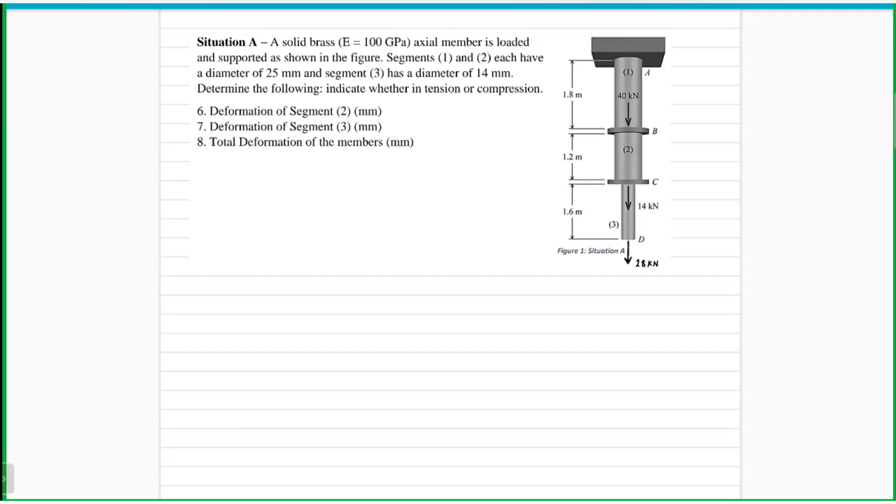As for our first step, we have to set up the axial force diagram. So starting at point A, I'll rotate the figure so it moves to the left side. And then point B, and then point C, and then point D.

So at point D, that's 28 kilonewtons. We have 14 at point C, and then we have 40 at point B.

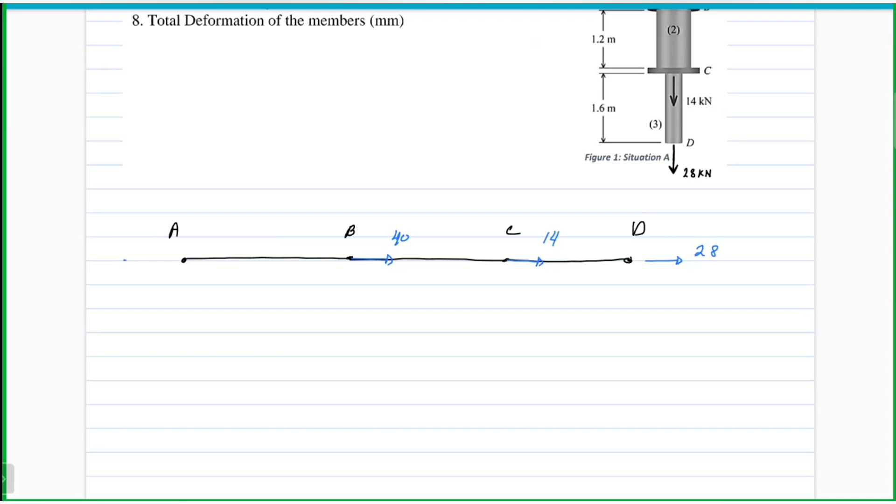Since it's attached at point A, it will have a reaction, and I'll assume that reaction will be to the left, or based on the original figure, upwards. So I'll call this PA.

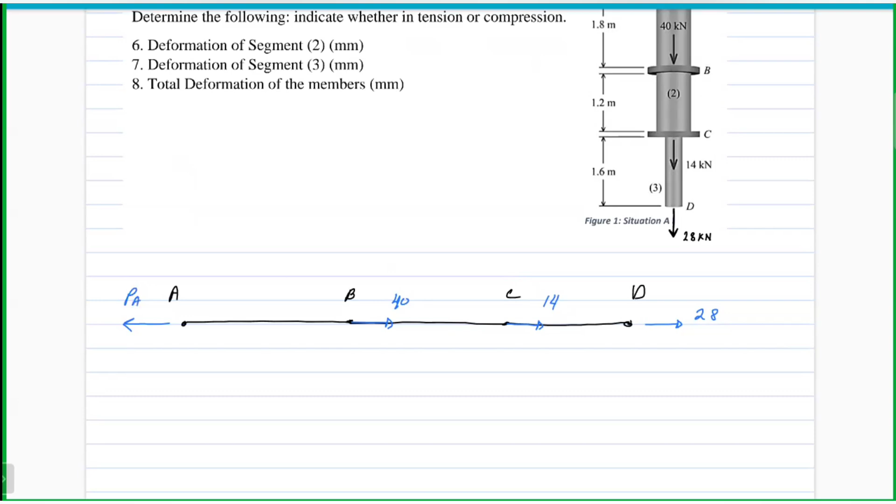Solving for the value of PA, we can use summation of forces along x equal to 0, with to the right as positive. So our reaction at point A: 40 plus 14 plus 28 minus PA equal to 0. So PA is equal to the summation of all the forces applied, which is 82 kilonewtons.

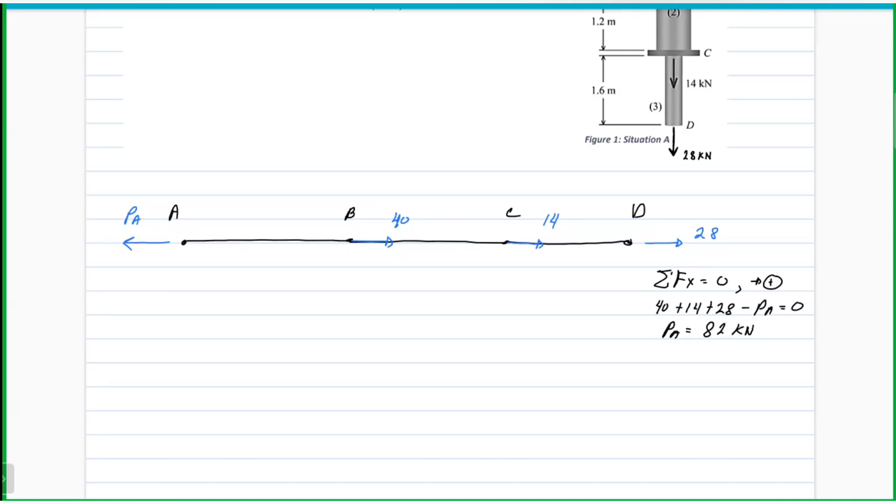And then I'll proceed on establishing the axial force diagram.

So PA is to the left, confirming our assumption. Since this is to the left, when plotted on the axial force diagram, it's negative. But in this figure, force A is acting away from the body, therefore this is in tension, and all positive values will be in compression.

So from point A to point B it goes, and then will be counteracted by the 40 kilonewtons, resulting in negative 42, somewhere here.

And then from point B, that negative 42 will still go on to point C, and then will be counteracted by the 14 kilonewtons, resulting in negative 28. And then finally will be closed at point D.

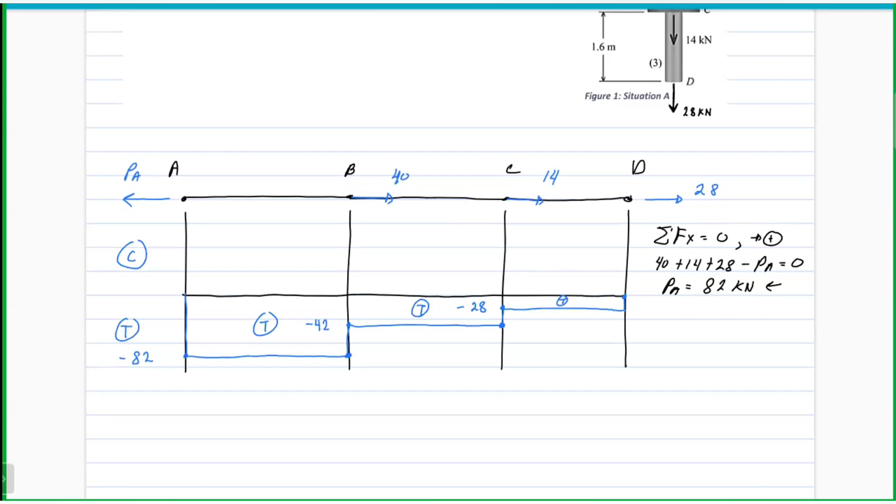So to determine the deformation, since deformation for member AB will be included later in the analysis for total deformation, let's get it too. You just have to be consistent. So deformation at member AB or bar 1, that's PL over AE.

We have an internal force of 82 kilonewtons, which is positive since this is tension, to be converted to newtons to be consistent. The length of member AB is 1.8 meters, times 1,000, over the area. Since only the diameter is given, we have to determine its area.

That's pi over 4 for a circular area times the diameter for bar 1, which is 25 millimeters. The modulus of elasticity is a constant of 100, multiplied by 1,000 to make it megapascal. From this we can cancel out the 1,000, and the 1,000 from the force remains.

So to solve for the value of the deformation, all you have to do is input this in your calculators. And then we'll have the value of 3.0069 millimeters.

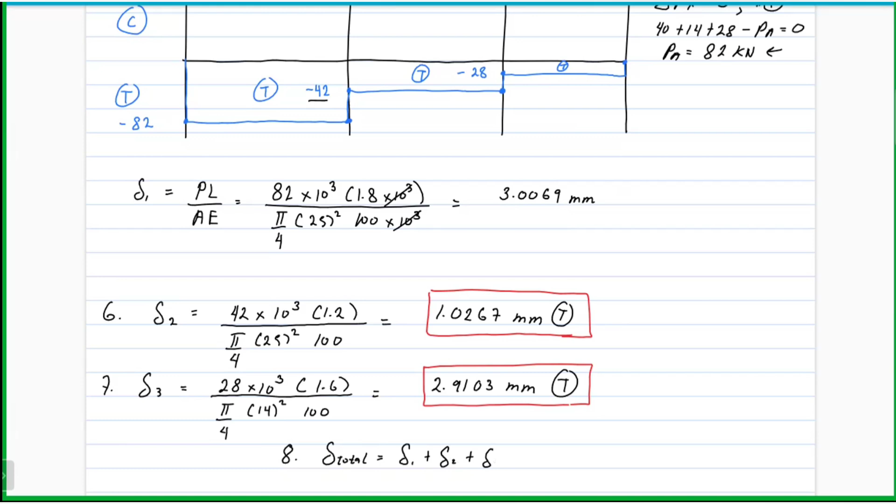So that is equal to deformation 1 plus deformation 2 plus deformation 3. Since all deformations are in tension, we just have to add up all the values for the deformation, and it will result to 6.9439 millimeters.

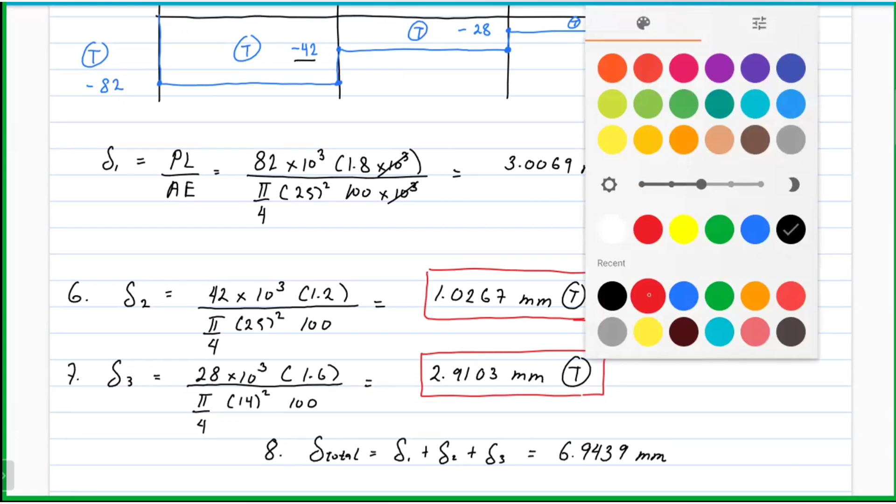So the answer for the number is this.

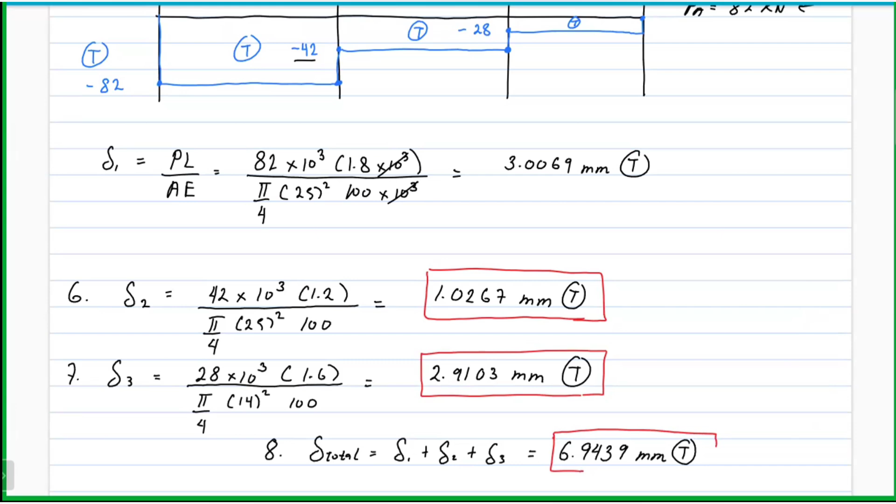Okay, so for situation B, this is another loaded bar problem, but this time it is statically indeterminate. Our strategy here is we must establish the equation, or another set of equations, using the principle of superposition.

The question states that the gap between C and the rigid wall at D is initially 0.15 millimeters, meaning there is an initial gap between point C and point D. A force P equal to 200 kilonewton is applied to the assembly, and we're given the modulus of elasticity and diameters for the members. We have to determine the following support reactions at point A and at point D.

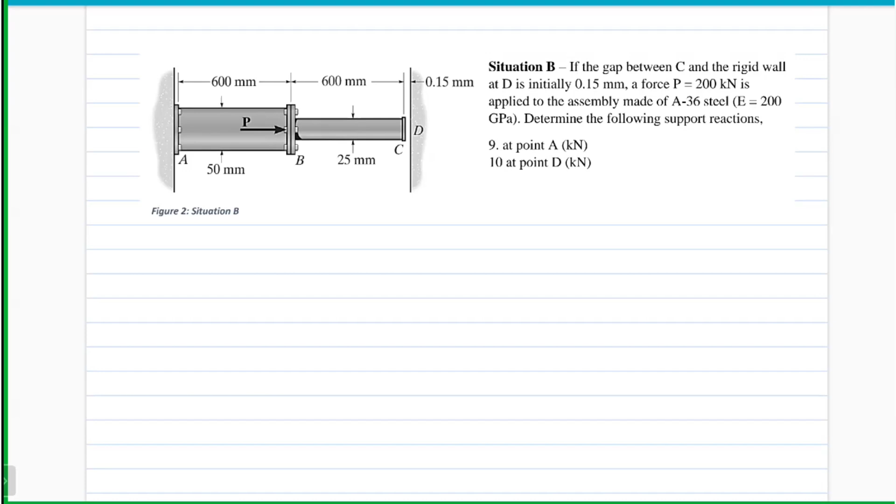So fortunately, we only have to determine the reactions. Setting up the free body diagram, we will know that this force of 200 kilonewton will push member AB up to point D, which will result in a reaction at point D.

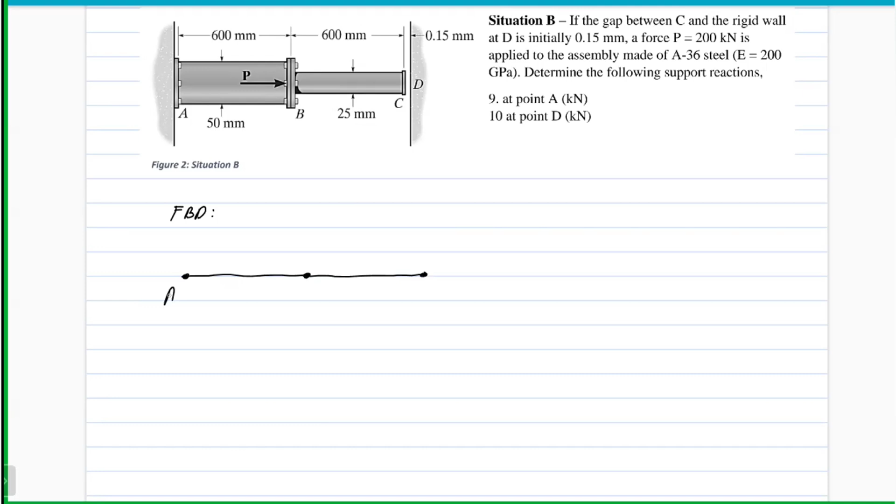So in this free body diagram, I will include the reaction at point D that resulted when it was pushed by the force. So this is point A, point B, and point D.

There is an applied force of 200 kilonewtons, and I assume the support will resist it to the left. So this is force D, this is force A.

By establishing the equation of equilibrium along x equal to 0, with to the right as positive, it becomes negative PA plus 200 minus PD equal to 0, or PA plus PD equals 200, equation 1.

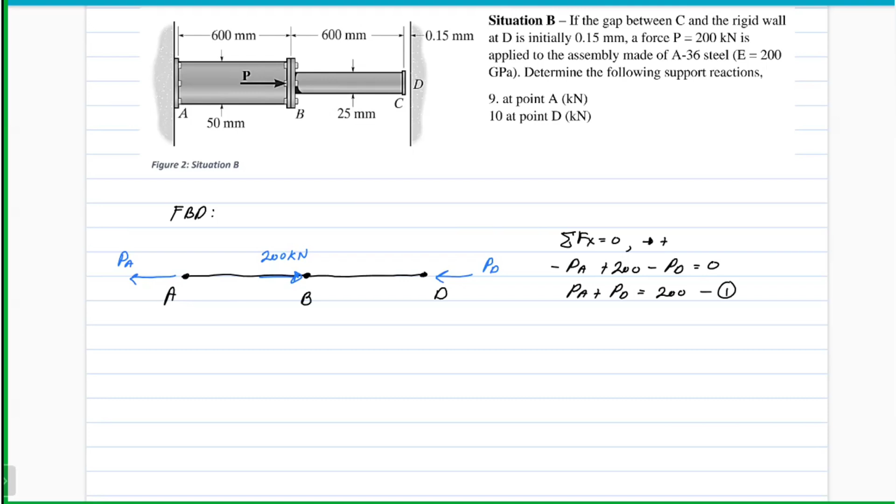So again, we have to generate another set of equations using the principle of superposition. I'll set the force D as the redundant.

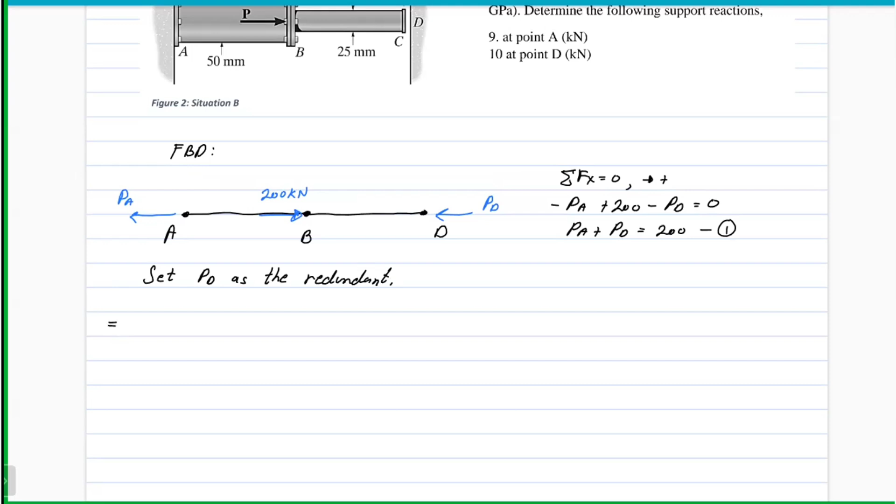So therefore, the original system is equal to the system in which the redundant is removed. So here it is now, I'm drawing again the new free body diagram wherein the redundant has been removed.

This will cause the member to freely deform at point D, so it will have a deformation caused by the load. I'll call this the deformation caused by the load P.

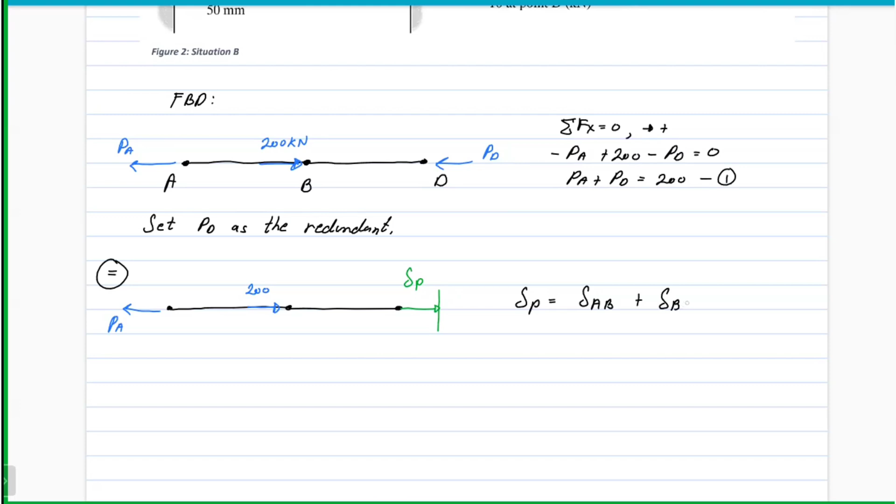So to determine the deformation at point D, that is equal to the total deformation of the members, which is the deformation of AB plus the deformation of BD.

So we establish the actual force diagram for this system. By observation, we know that PA is also equal to 200, resulting in a tension member with a value of 200 kilonewtons. As you can see, no internal force is built up at member BD, so the deformation on BD will be equal to 0.

So deformation of AB is equal to PL over AE. Our force is 200 kilonewtons, which I'll multiply by 1,000. The length of member AB is 600 millimeters, already in millimeters, so there's no need for conversion.

For the area, this is a circular area, so that's pi over 4 times the diameter squared. We have a diameter of 50 for member AB, and modulus of elasticity is 200, which I'll multiply by 1,000 to convert into megapascal. So to solve for the deformation, that is equal to 200,000 times 600 over pi over 4 times 50 squared times 200,000.

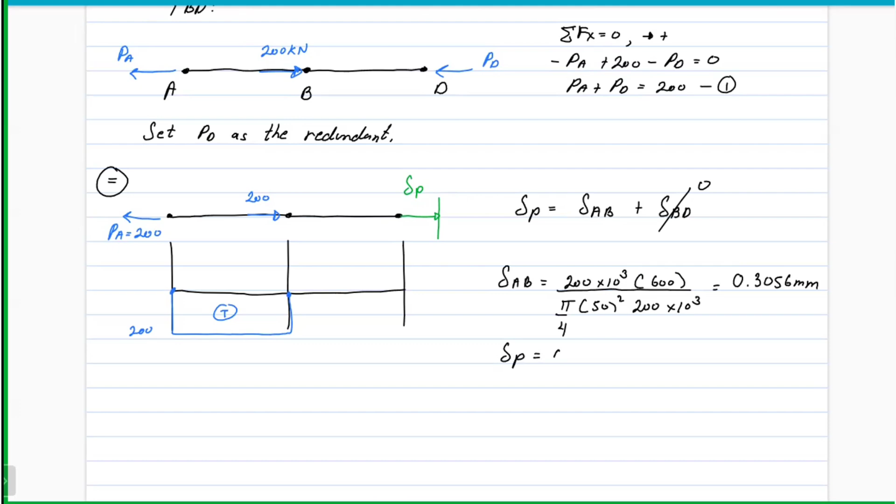So the deformation on AB is equal to 0.3056 millimeters, the deformation on P is equal to 0.3056 millimeter. I'll just highlight this value, we'll return to it later.

And then, of course, by the method of superposition, we have to return our redundant. When we return the redundant, we no longer consider the forces we used in the previous free body diagram.

So we bring back PD and place it at point D, which will be the new point D. I'll call this D prime, B, and A. It now returns point D to its original location, so I'll call this deformation as deformation at D prime.

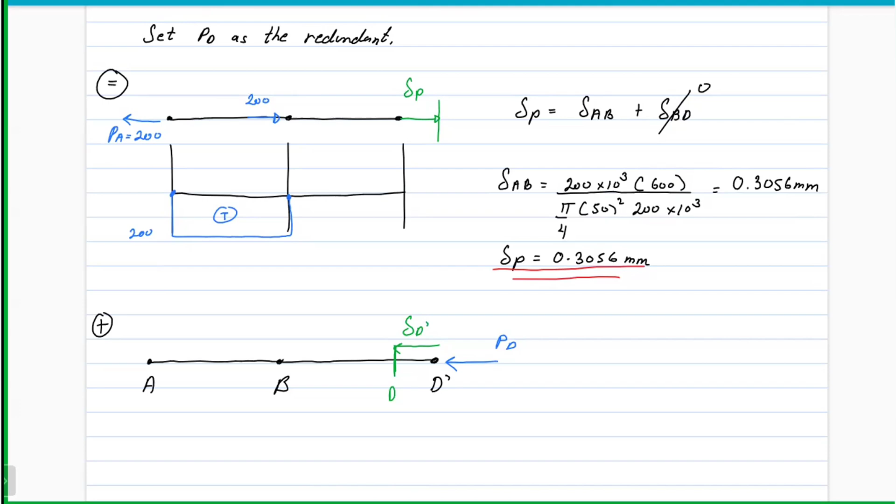So that deformation at D prime is equal to the deformation of AB plus the deformation of BD prime.

So again, to compute for the deformation of AB, we just have to expand this to PL over AE plus PL over AE for the second member.

For AB, we can see from the actual force diagram that there's an imaginary reaction caused by PD. So I'll call this PA prime, which is also equal to PD. Therefore, our actual force diagram is subjected to compression, so the value of the internal forces from point A to point B is actually

PD. So if we expand this equation, it will be equal to PD times the length of the first member, which is 600, over the area, that's pi over 4 times 50 squared times 200

megapascal. So the deformation consideration will be negative for compression. So plus negative

PD. So for member BD prime, the length will be 600 millimeters. Then the length of BD over pi over 4, diameter is 25 squared times 200,000.

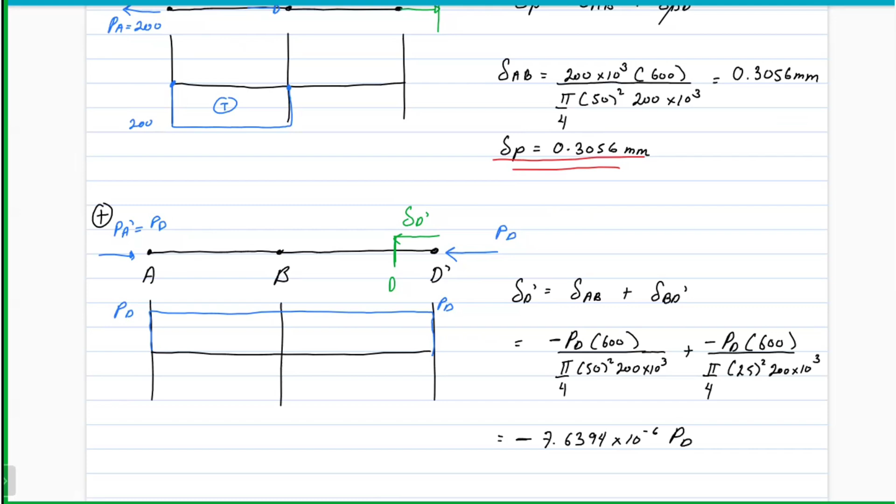So when we combine this equation, the original deformation at D is equal to the deformation caused by the load P plus the deformation caused by the redundant, which we call D prime.

Initially at point D there's a gap of 0.15. So we equate this: 0.15 equals the deformation caused by the load, which is 0.3056.

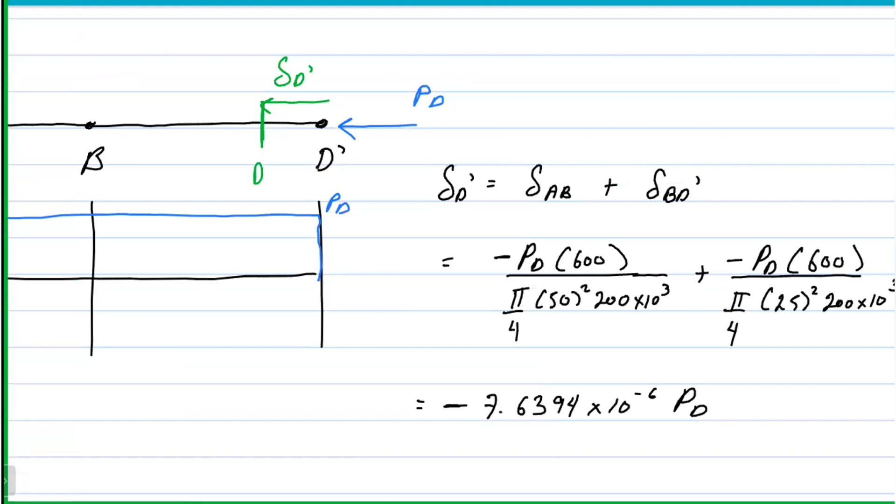And then what we got from bringing back the redundant is equal to negative 7.6394 times 10 raised to negative 6 PD.

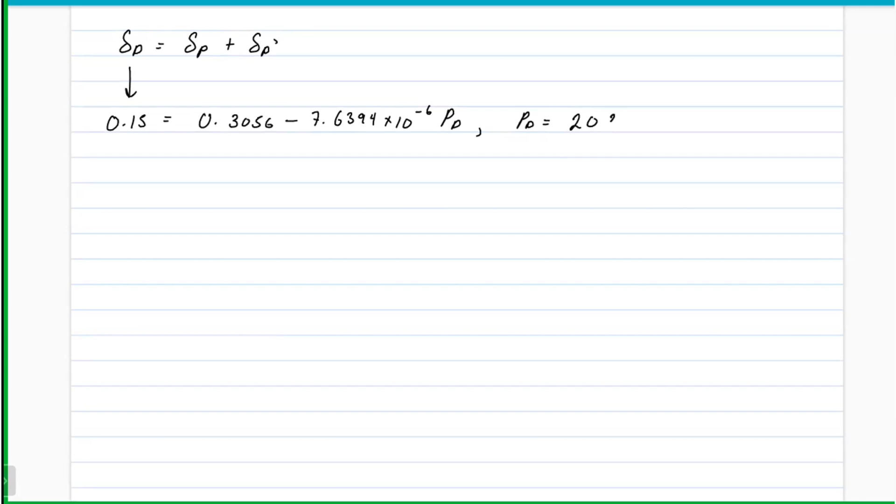So solving for the value of PD, we have one equation, one unknown. So our value will be 20368.09.

Since we converted into newtons earlier, this will be in newtons. So actually, this is the answer for point D. And we're required to express it in kilonewtons, so we have to divide by 1,000. So that's 20.37 kilonewtons for number 10.

So number 10 comes first. Answered.

And then using equation 1, we have PA plus—positive, so our assumption was correct—20.37 equals 200. Therefore, PA is equal to 179.63 kilonewtons for number 9.

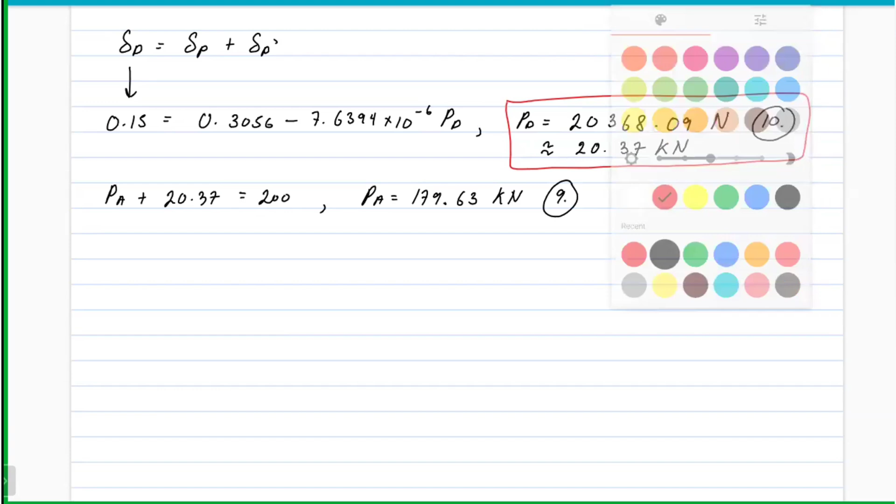Okay, so that's the answer and solution for situation B. All right, so moving on to the next situation.

So we have situation C, a coplanar force system. Basically this is a statically indeterminate problem because the lack of horizontal forces makes it statically indeterminate.

By the problem, the rigid bar BDF is supported by three identical 15 millimeter diameter steel rods, with the spacings given. Our objective here is to determine the value of the forces for rod 2 and rod 3, and additionally to determine the vertical displacement at point B.

So this is a three-part question since the vertical displacement at point B is also equal to the deformation of rod 1. So, let's begin.

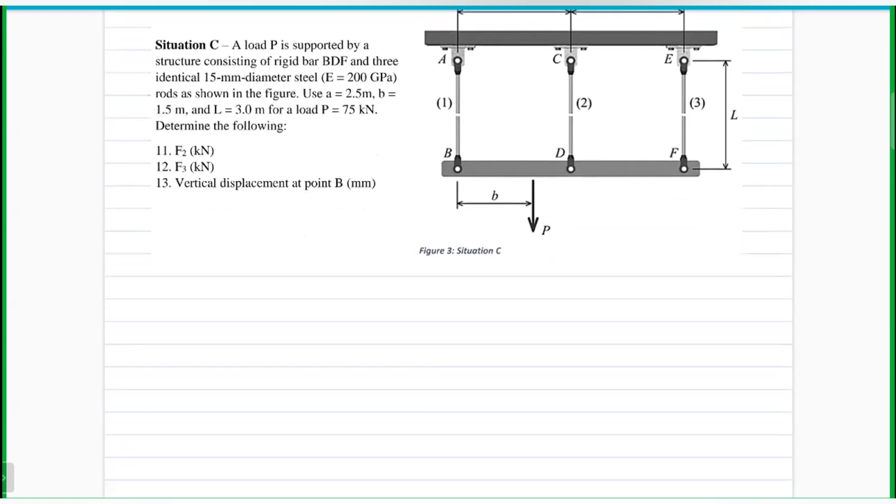So for our first step, we have to determine or establish the free body diagram of the bar, as you can see, we set it up here. Okay, so the supports.

For rod 1, I'll call this F1. For rod 2, I'll call this F2. And for rod 3, I'll call this F3. And then we have an applied force somewhere between point B and D.

So let's put in the spacings: this is 2.5 meters, 2.5 meters. The value of the force applied is 75 kilonewtons. The distance of the applied force to point B is 1.5 meters.

Okay, so for our equation, since our objective is F2 and F3, it will be convenient to take the summation of moment equal to 0 at point B, in order to eliminate F1. So that will be convenient for us.

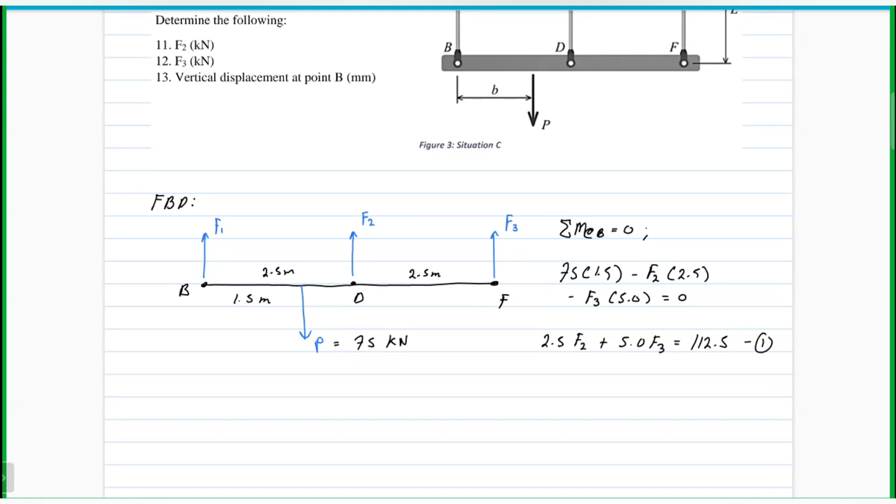Okay, so simplifying the equation, we have 2.5 F2 plus 5 F3 equals the moment of the force to point B, so that's equal to 112.5. This is equation 1. Now if we take the summation of forces along the y-axis equal to 0,

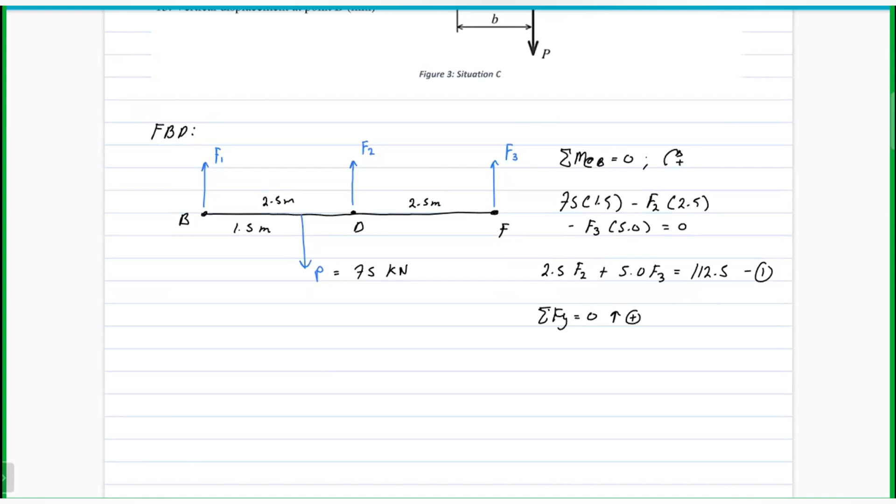we will have F1 plus F2 plus F3 equal to 75. Let's call this our equation 2.

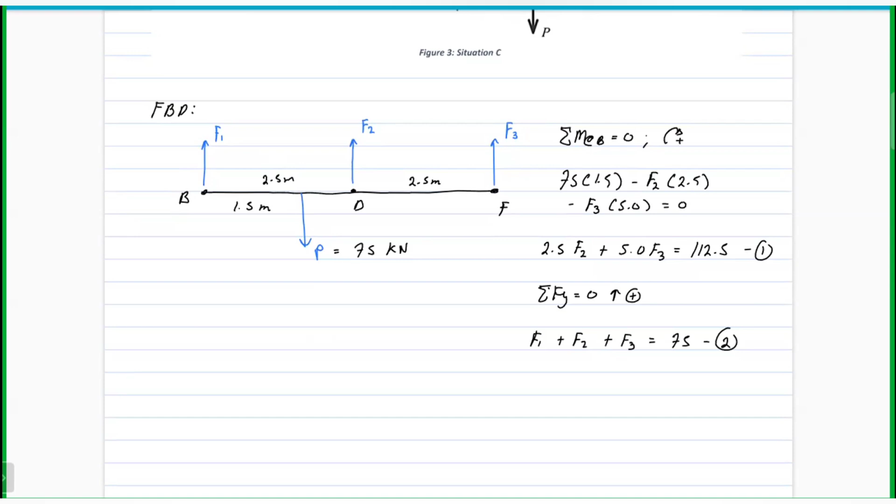As you can see, we can't take a summation of force along the x-axis, and the number of reactions exceeds our available equations. So therefore, this is statically indeterminate. For this type of problem, we need to generate another set of equations by establishing the deformation diagram.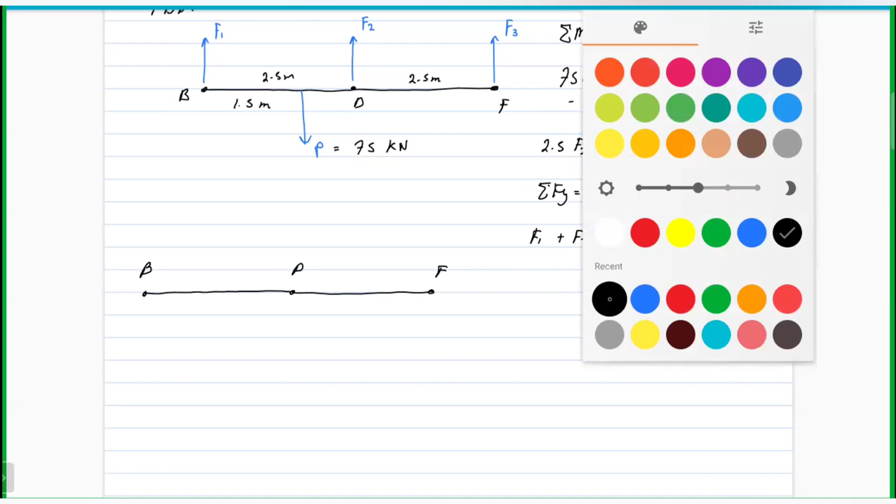Para makapag-generate tayo ng force deformation equation, we just have to draw yung kanyang original position. I'll call this B, point D, point F. Since asymmetrically yung pag-apply nung force at point D, so the tendency is mas mababa yung magiging displacement nung nasa left side beyond point D kesa dun sa right side. So this will become the new position of the bar. Itong length na to, this is displacement at point B, or equal din siya dun sa naging deformation ng rod 1. This is deformation at point D, or the deformation of rod 2 and the deformation of rod 3. As you can see, nakapag-form tayo ng trapezoidal shape with this deformation diagram.

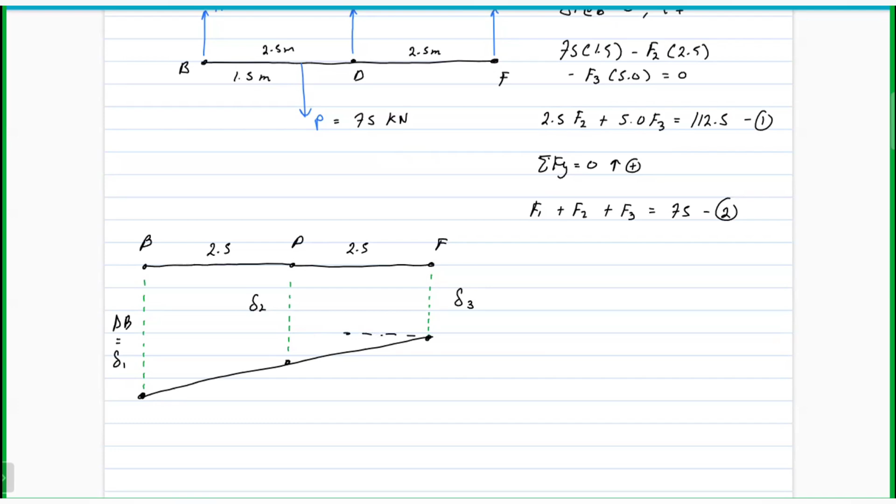Kailangan ma-eliminate natin or ma-produce natin yung triangle so we can proceed with the ratio and proportion. So ito siya. By projecting yung bar, I mean yung F prime papunta dun sa left side, makakabuo tayo ng right triangle. And from that right triangle, I just have to isolate yung right triangle na yun. So makakapag-form tayo ng bagong sides. Itong side na to will be deformation 1 minus deformation 3. Itong side na to, that is equal to deformation 1 minus itong deformation 3. Para itong side na lang yung matitira. Kaya nag-come up tayo dyan.

Dito naman sa gitna, we have to follow the similar concept. So this is deformation 2 minus deformation 3. So from this deformation diagram, we could use ratio and proportion to relate the two equations. So we have the bigger triangle, so that's deformation 1. Ito 2.5 pa rin naman yan. Minus deformation 3 over 5 equals deformation 2 minus deformation 3 over 2.5.

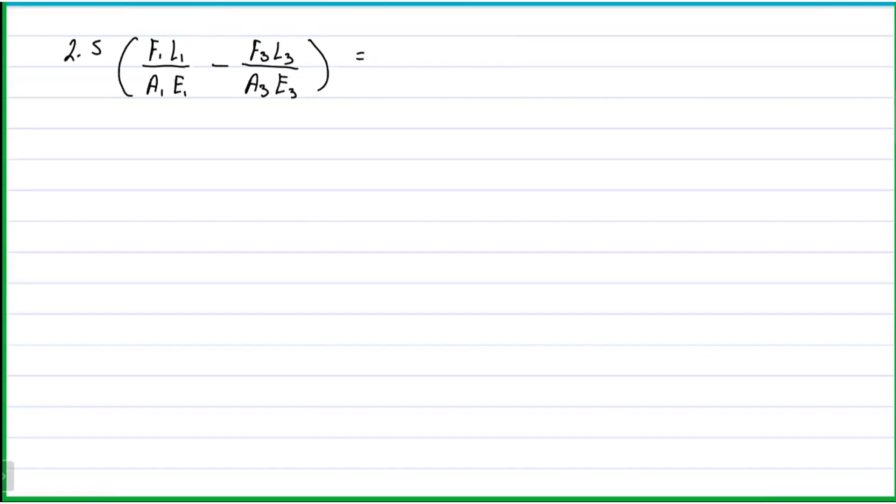Moving on, we have to expand yung equation natin. So this will become F1, L1, A1, E1 over 5. Or better, i-cross multiply na natin yung mga denominators para hindi na dumami yung fractions natin. So this will become 2.5 times F1, L1, A1, E1 minus, that's for rod 3, so F3, L3, A3, E3, equals, so yung isa naman is 5 times F2, L2, A2, E2 minus F3, L3, A3, E3. Inserting the values for the lengths and the areas.

Medyo maproseso lang talaga, but be patient lang. So F1, the length of the rods are the same, so let's convert this into millimeters. Area naman, diameter yung binigay, so that's 15 millimeters, so that's pi over 4 times 15 squared. And modulus of elasticity is 200,000. Since hindi tayo naglagay ng 1,000 dito, we assume na this is already in kilonewtons, kaya hindi tayo naglagay. So lagay tayo ng additional 1,000 dito para i-assume natin na this is in newtons.

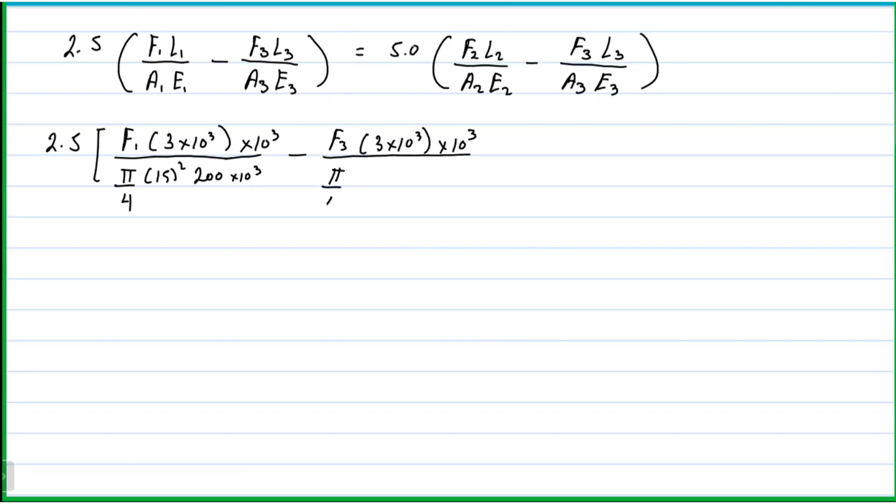Kaya tayo naglagay ng 1,000, minus F3, similar lang, copy-paste. Kung magkaka-copy-paste lang natin yan, times 1,000, since identical kasi yung properties niya. At ganun din sa kabilang side, sana magkasya. So this is F2, copy-paste lang ng properties dahil identical naman sila. So this is, so minus, F3 naman, ganun din.

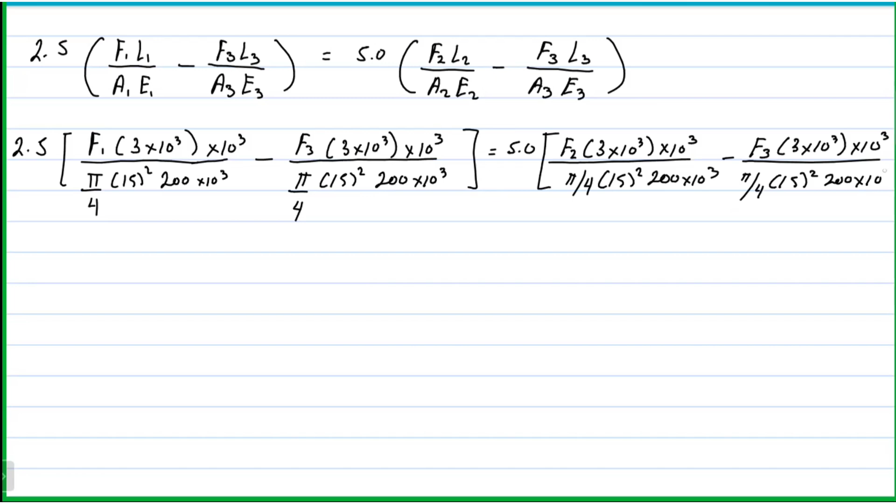Next step is to simplify. Simplify lang natin, kaya yan. Matitira dyan, ibig sabihin isang beses mo lang siya kukumputin dahil pare-pareho naman sila, so mabilis lang, isang beses nyo lang siya kukumputin. So this will become 0.084 F1 minus 0.084 F3 is equal to 5 times 0.084 F2 minus 0.084 F3.

So distribute naman natin yung nasa labas. This will become 0.21 F1 minus, so pareho lang, 0.21 F3, equals 0.42 F2 minus 0.42 F3. So combine similar terms, i-arrange natin siya, unahin ko si F1. Si F2, I'll transpose this on the left side, so this will become negative 0.42 F2. And then finally, si F3, pag transpose natin, so magiging kalahati lang, this will become positive 0.42 F3 equal to 0. So this will become our equation 3.

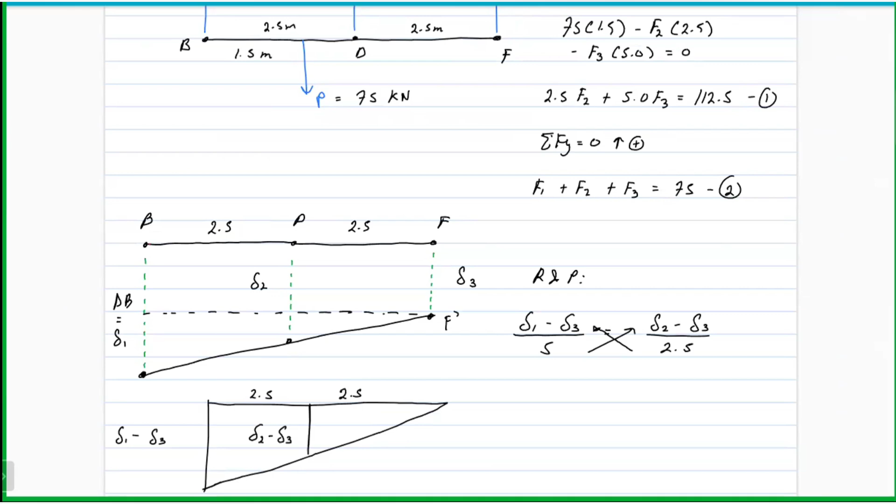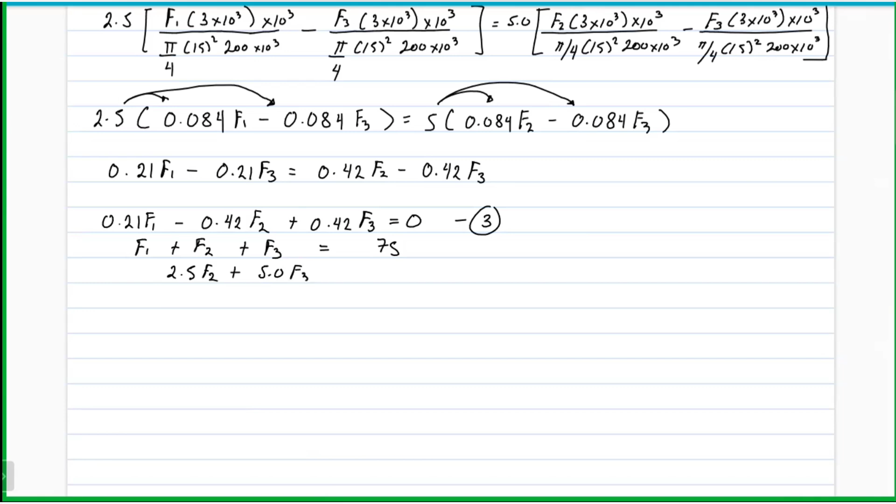So solving simultaneous equations, three equations, three unknowns. Equation 2 natin is yung F1 plus F2 plus F3 equals 75. And then for equation 1, so almost naka-arrange na rin siya, so this is 2.5 F2 plus 5 F3 equals 112.5. So equation 2, equation 1. So solving for three equations, three unknowns, gamit na lang tayo ng calculator technique, so that's mode 5, 2.

So the value for F1 is 38.57 kilonewtons. This is 27.86 kilonewtons. And then we have 8.57 kilonewtons. So based on the problem, this is number 12.

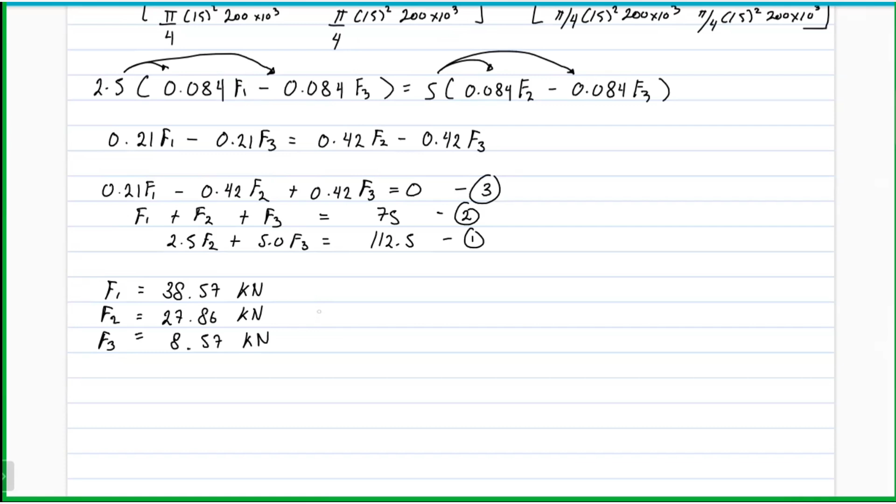This is number 13. And then for number 14, the displacement of point B is also equal to the deformation of rod 1.

So that's F1, 38.57 times 10 raised to 3, and then we have the length of bar 1, which is equal to 3. We don't need to multiply that by 1,000 because it will just cancel out. So that's pi over 4, 15 squared, and modulus of elasticity is 200.

So the deformation of bar 1, or displacement of point B, is equal to 3.2739 millimeters. So this is our number 14.

So for situation D, a concurrent force system is waiting to be solved. This is statically indeterminate since we have three unknowns and we can only use two equilibrium equations for this problem.

Additionally, we have thermal parameters, so thermal stresses are involved. The condition for the temperature in this system states that the temperature increases by 60 degrees Fahrenheit, meaning we have elongation in the system which will affect our deformation diagram.

So our objective here is to determine what will be the normal stresses at bar 1 and 2, and finally the displacement at point D. For this type of problem, our first step is to establish the free body diagram.

So at point D, our free body diagram will look like this. We have member, I'll call this PDC. I'll call this PBD. Then I'll call this PAD. And here the applied force P is equal to 34 kips.

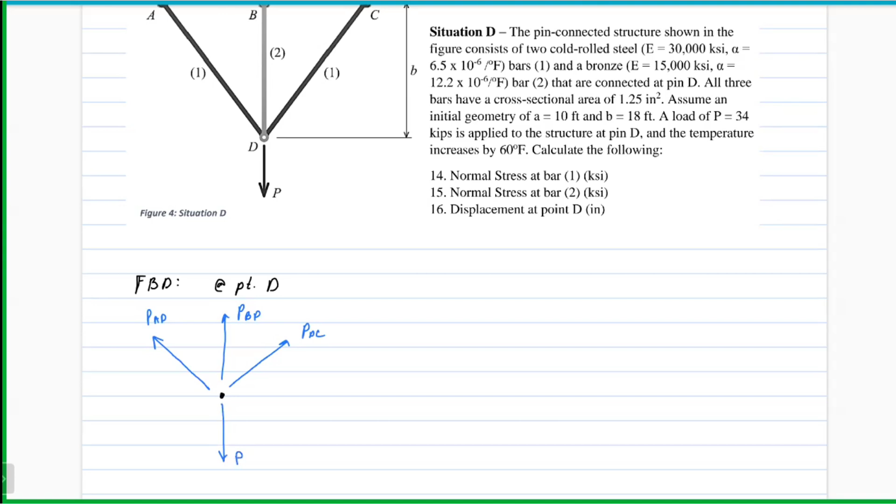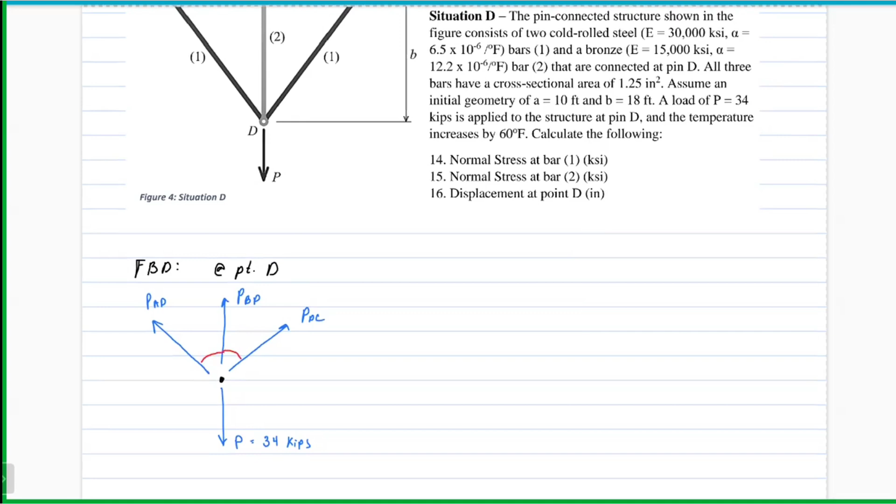It will be better if we also find the angle in between, using the triangle from the system. So we have point B, and this is equal to 18 feet.

The length of bar 1 is not stated, I believe. So A is equal to 10 feet. Using the Pythagorean theorem, we could solve for the length of AD: that's equal to the square root of 10 squared plus 18 squared, which is 20.59 feet.

And additionally, okay, we could get the angle in between. Let's call this theta. We could utilize cosine: cosine theta is equal to 18 over 10, therefore theta is equal to...

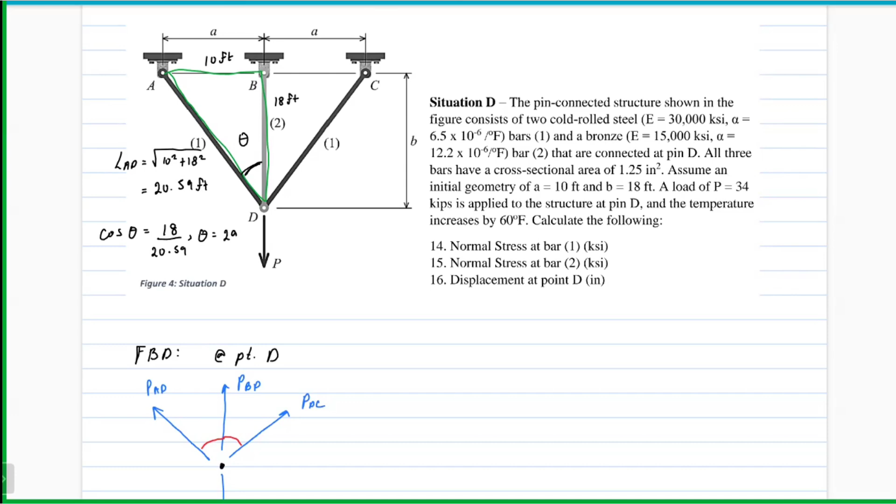I'm sorry, it's not 10, it's 20.59. So this is 29.05 degrees. That's 29.05 degrees, and it's similar on the other side since the system is symmetrical.

So by writing the equations of equilibrium, we sum the forces along x equal to 0: negative PAD sine 29.05 plus PDC sine 29.05 equal to 0. The values cancel out, so negative PAD plus PDC is equal to 0. I'll write it this way so that later, when we have 3 equations and 3 unknowns, it will be quick to solve.

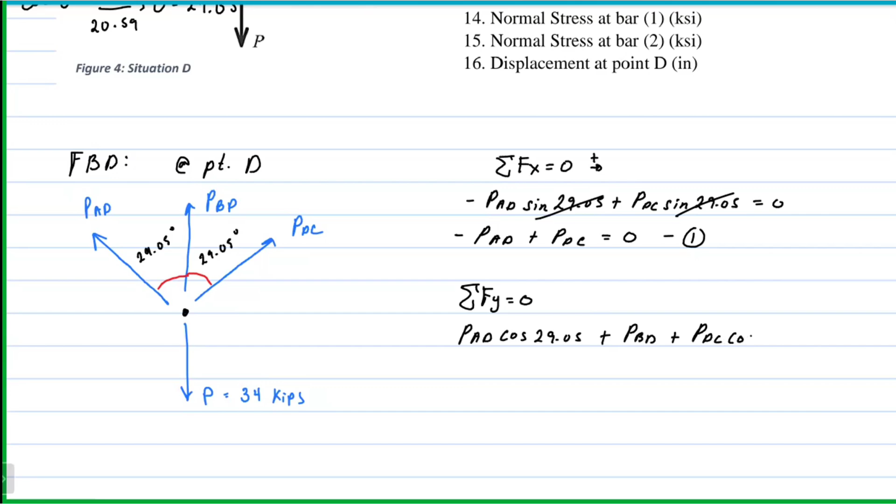And then summation of forces along Y equal to 0: positive PAD cosine 29.05 plus PBD plus PDC cosine 29.05 is equal to 34 kips. So this is our equation 2.

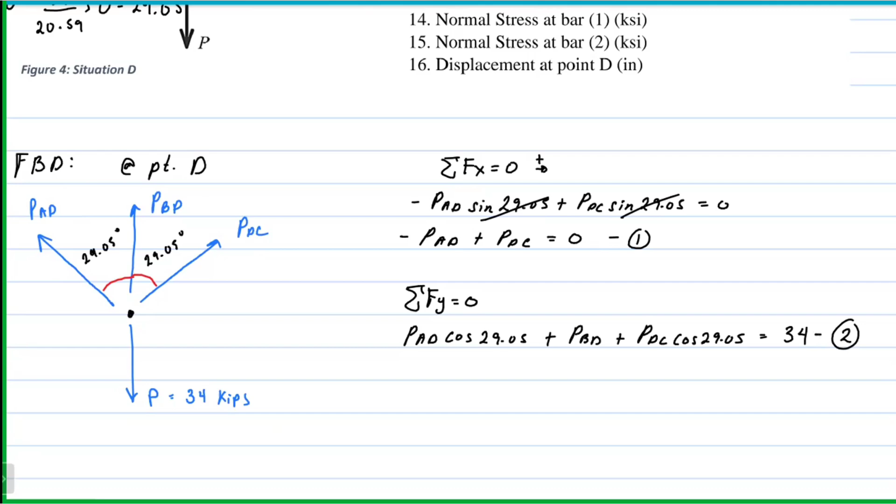For our last equation, we have to establish the deformation diagram of the figure. This is point D. What will happen is it will have a displacement due to the load - the deformation of BD, and then another deformation based on thermal effects.

So for the left side of point D, there will be a stretch in DC, and it will also be elongated due to the temperature change of DC. Let me just adjust the figure, so here it is.

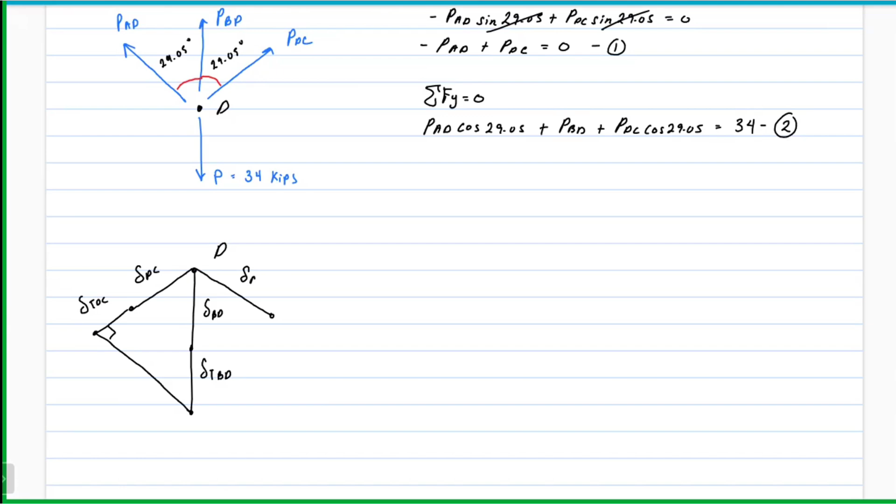And similarly on the other side, there will be a stretch in AD, and additionally it will stretch further due to the temperature change - the thermal deformation. So this is our angle from the initial figure.

Since the triangles are symmetrical, we can consider just one triangle. So you can consider the triangle on the left side. Let me enlarge the figure so it's easier to see.

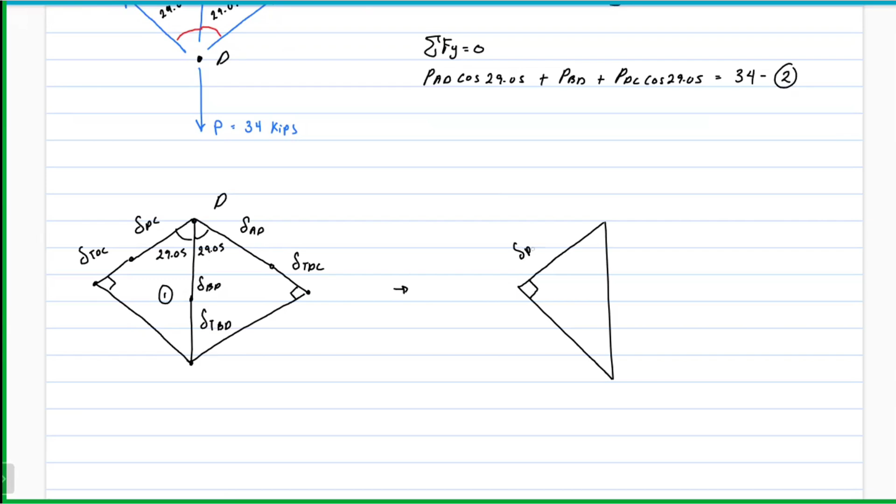This is equal to the deformation of DC plus the thermal deformation of DC, and the deformation of BD plus the thermal deformation of BD, with the 29.05 degree angle here.

By relating the two sides, we could use the cosine function: cosine 29.05 is equal to the adjacent side, which is the deformation plus thermal deformation, over the deformation of BD plus the thermal deformation of BD. So this is our force-thermal deformation equation. Let's also solve the thermal deformations so we can input them once we simplify.

Starting with the thermal deformation of DC - since they're not conveniently the same, bar 1 has a coefficient of thermal expansion, alpha, of 6.5 times 10 raised to negative 6. The length of DC, which we found earlier, is 20.59.

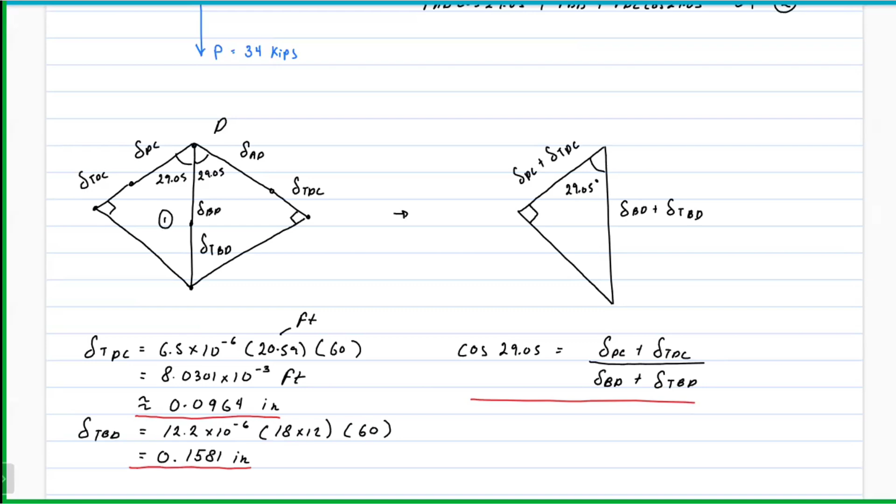Plus the thermal deformation of DC, 0.0964, over the deformation of BD. Plus the thermal deformation of BD is 0.1581. Well, let's simplify first.

Let's insert the values. So we have P of DC, length of DC which we solved earlier, that is 20.59. Take note, that's feet. So let's multiply this by 12 to make it inches. Area is the same, they have the same area, so we're convenient there. Bar 1, or PDC, or bar 1 is steel, so we will use 30,000 ksi.

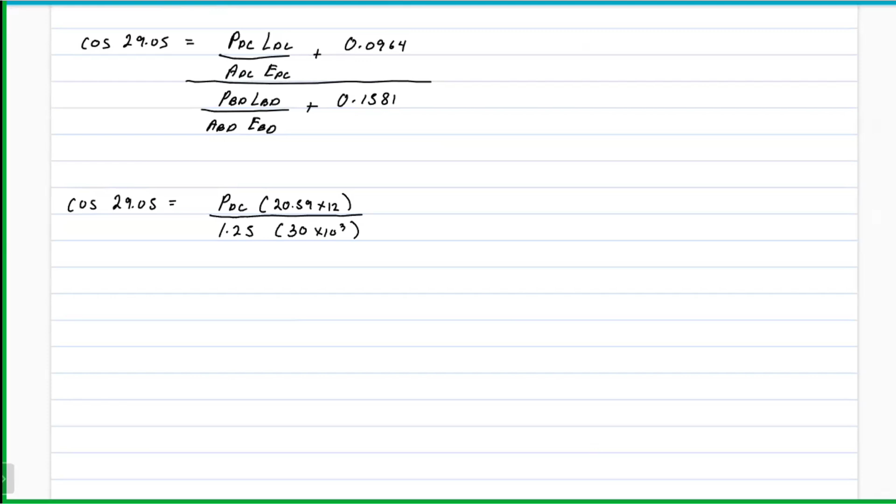So we don't have much of a problem since the value is kept in ksi, so I didn't convert the E. All over PBD. So length of bar 2 is 18 feet, so that's 18 times 12, over area, and then modulus of elasticity of bronze is 15,000 ksi, plus 0.1581. So let's simplify the numerical values.

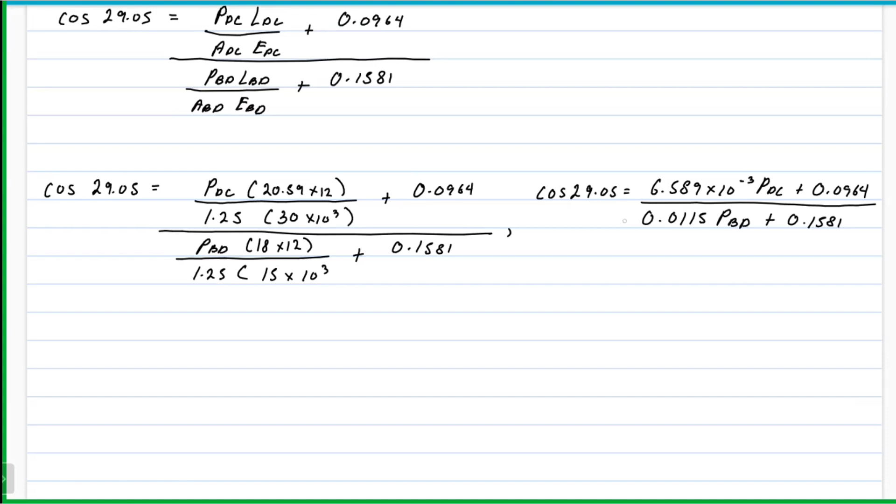So for the right side, let's not touch that yet. So that is equal to 6.589 times 10 raised to negative 3 PDC plus 0.0964 over 0.0115 PBD plus 0.15 equal. So for further simplification, let's cross-multiply that.

So let me go ahead and multiply. So 0.01... so we will have 0.0101, so let's keep it to 4 decimal places. PBD plus, when you multiply this here, plus 0.1582, 0.1382. Okay, and then that equals the other side, 6.589, just copying that. PDC plus 0.0964. Okay, so let's rearrange the equation now.

For us to set up three equations, three unknowns. So we have 0.0101 PBD. So let's transpose PDC so they're together, and then let's transpose the constant value of 0.1382. So this is negative 0.0418. So this is our equation 3.

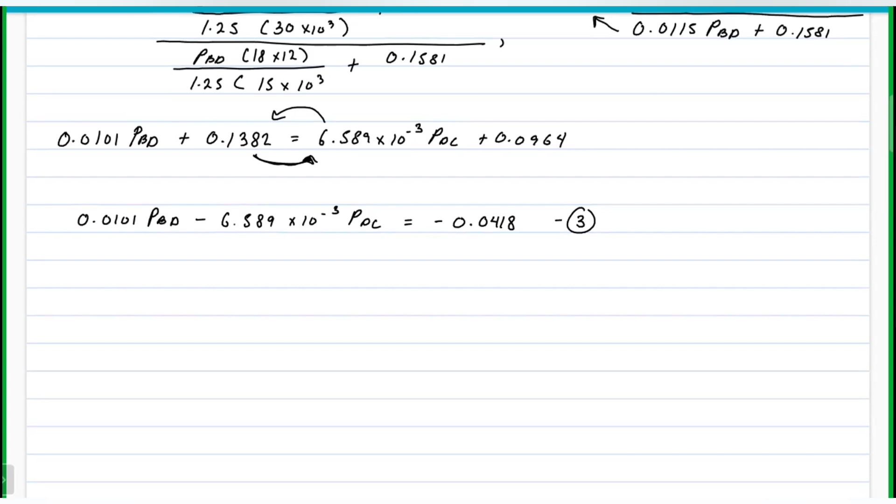So let's put equation 1 and 2 so we now have 3 equations, 3 unknowns. I'll start with equation 2. So cosine 29.05 PAD, and then plus PBD, and then plus PDC cosine 29.05 equal to 34. So this is our equation 2 from earlier.

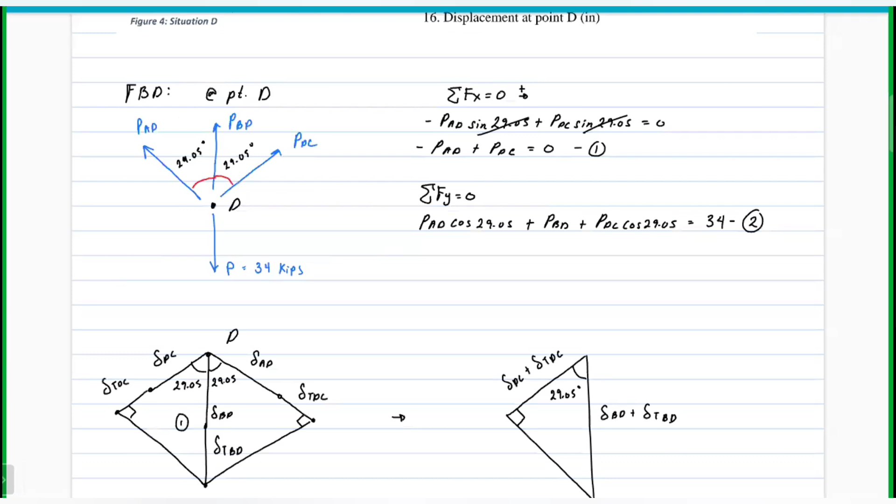And then equation 1, so that's negative PAD, and then plus PDC equal to 0. So this is equation 1. So I set it up like that so we don't get confused with the calculator.

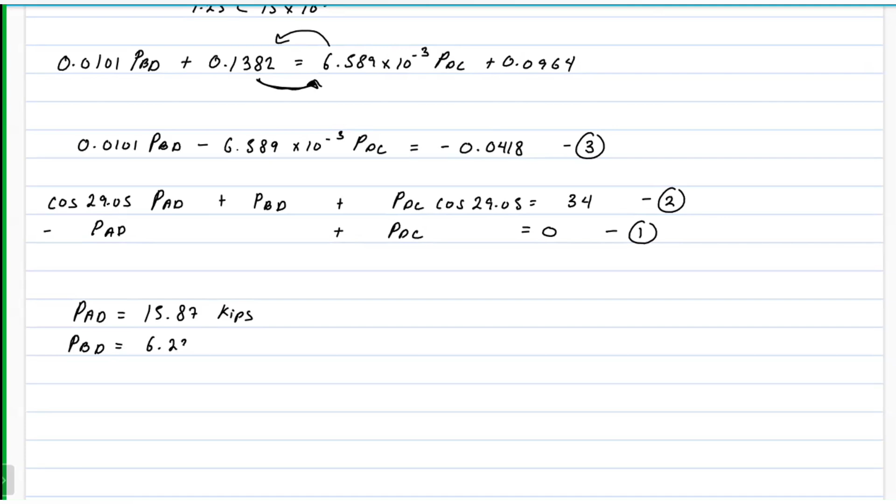Okay, so by using our equation mode on our calculators, the values for the following forces are as follows. We have PAD is equal to 15.87 kips, so the result is positive. PBD is equal to 6.23 kips. And then for PDC, that is equal to 15.87 kips. So that means our assumption that AD and DC are equal was correct.

Okay, so the question is, what are the normal stresses at bar 1? So for number 14, for bar 1, that's the force in AD, that's 15.87 kips over the area 1.25, giving us 12.70 ksi for number 14.

For number 15, stress in bar 2. So we use 6.23 kips over 1.25, which is equal to 4.98 ksi.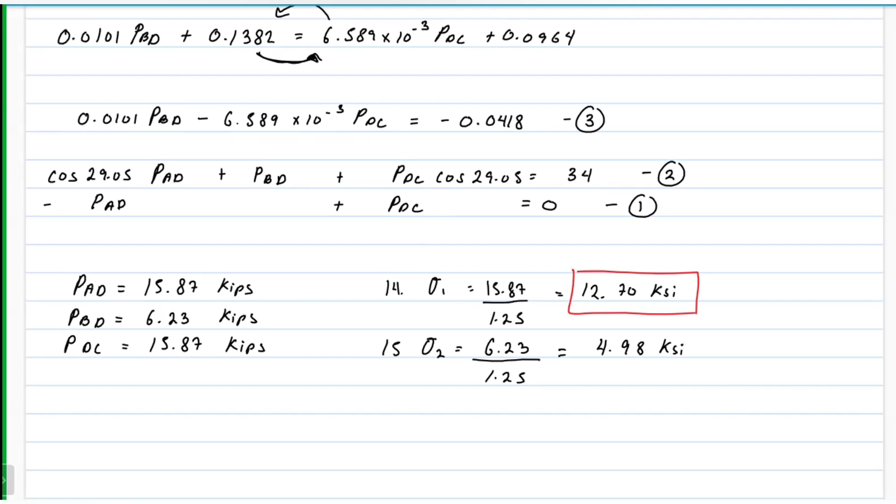And then finally, for the displacement at point D, that is equal to the deformation of BD plus the thermal deformation of BD. So for BD, that's 6.23 kips. The length of BD is 18, so times 12 to make it inches. Area is 1.25, and bar 2 has a modulus of elasticity of 15,000. And then plus the thermal deformation of BD, 0.1581.

Therefore, the displacement at point D is equal to 0.2299 inches. So these are the solutions for this problem situation.

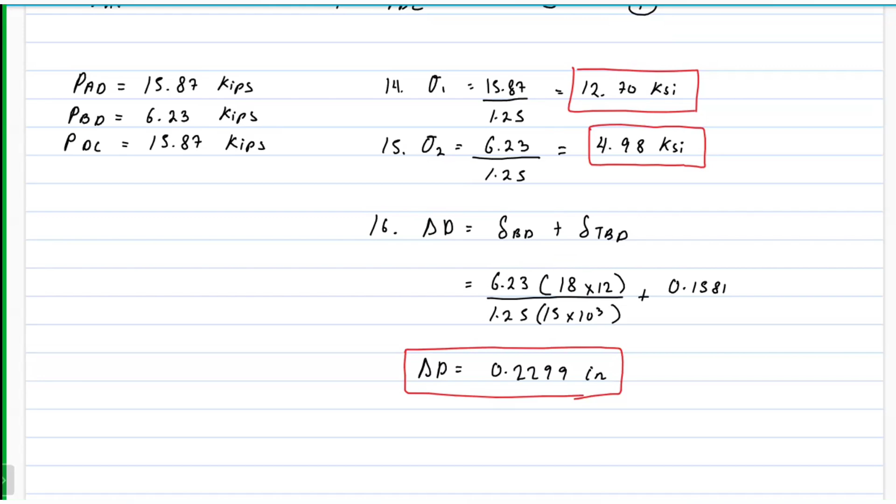Okay, so for our last problem, we have situation E. A reinforced concrete column is designed to carry an axial compressive load. We are given the parameters of the stresses for the concrete and the working stress for steel, as well as the material properties of their moduli of elasticity. The objective of this problem is to determine the number of reinforcing steel bars required to resist the applied axial load, given that the diameter of the steel bar is 18 millimeters.

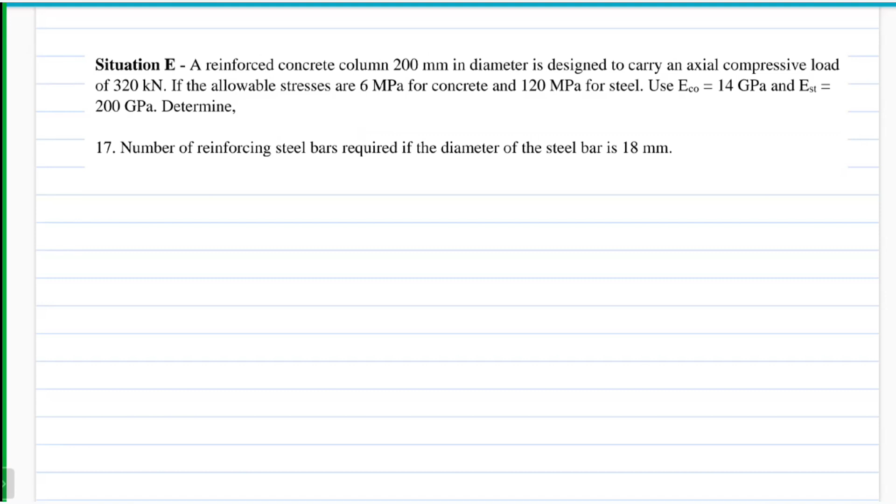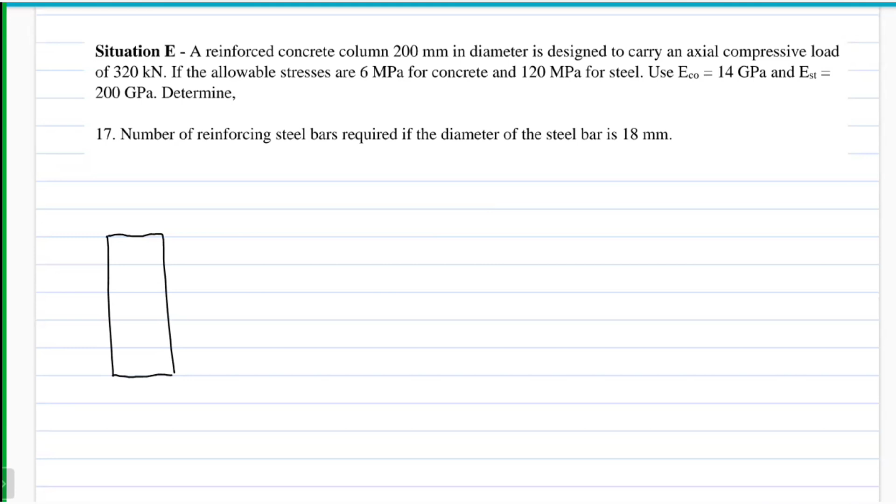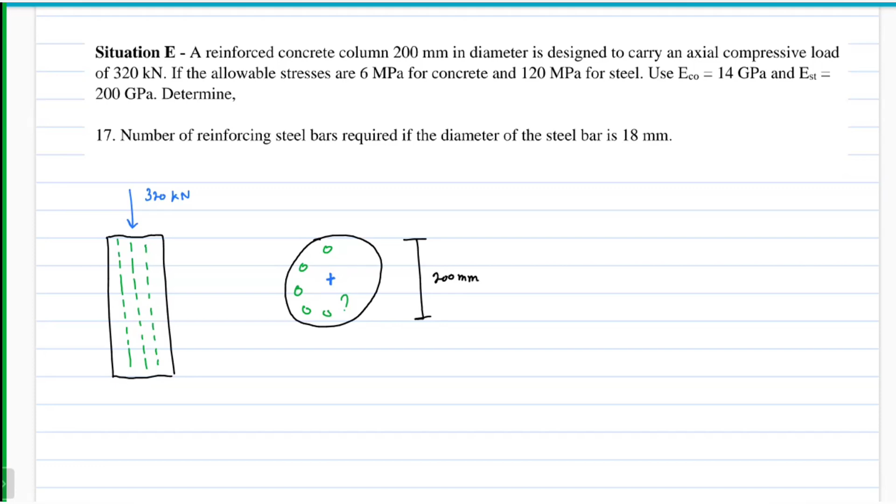At first, wala siyang figure na given, pero we could visualize yung concrete column. Yung concrete column is circular in shape for its cross-sectional area, and meron siyang certain number of steel bars sa loob na hindi natin alam kung gaano karami. Applied siya ng axial load of 320 kilonewtons, assumed applied sa centroidal axis ng column. Meron siyang diameter of 200 millimeters. Based dito sa figure, the concrete itself will resist the axial load.

So we have here the force of the concrete, and assuming na yung steel bars natin is placed symmetrically sa loob ng concrete, we could assume na yung force ng steel also applies doon sa centroidal axis ng concrete column. Pag in-establish natin yung equilibrium equation, summation of forces along y-axis equal to 0, we could say that the force of concrete plus the force of the steel is equal to 320 kilonewtons.

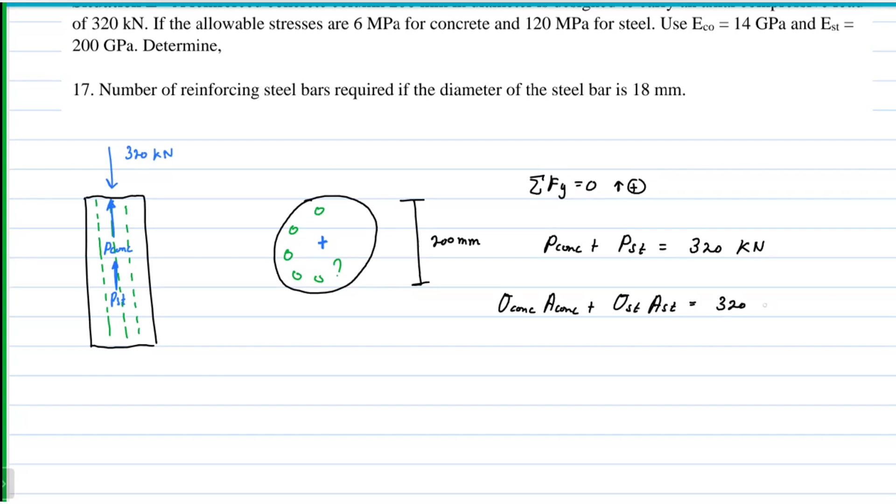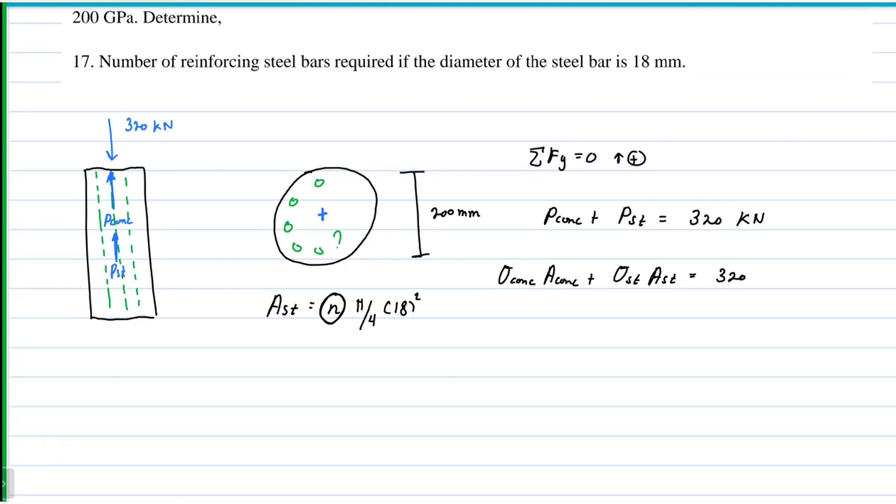Since binigyan tayo ng allowable stresses for the parameter, i-alter natin yung equation in terms of stresses. We could say that this is the stress of concrete times the area of concrete plus the stress of steel times the area of steel equal to 320 kilonewtons. Pero ang problema dito, wala tayong total area of the steel, kasi ang area of steel is equal to N, or the number of steel bars, times the area for a single steel bar, which is pi over 4 times 18 squared. So ito yung hinahanap nating unknown.

So paano gagawin natin? Pag in-establish naman natin yung area of concrete, alam natin na that is pi over 4, 200 squared, yung total area ng concrete column, minus the area of steel. Ibig sabihin, meron tayong missing variable dito. So we could set up the equation na ang unknown niya is the area of steel.

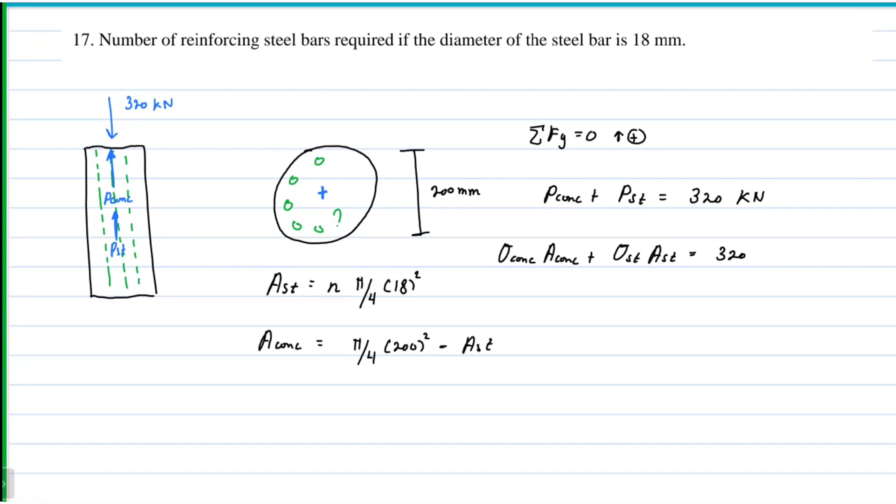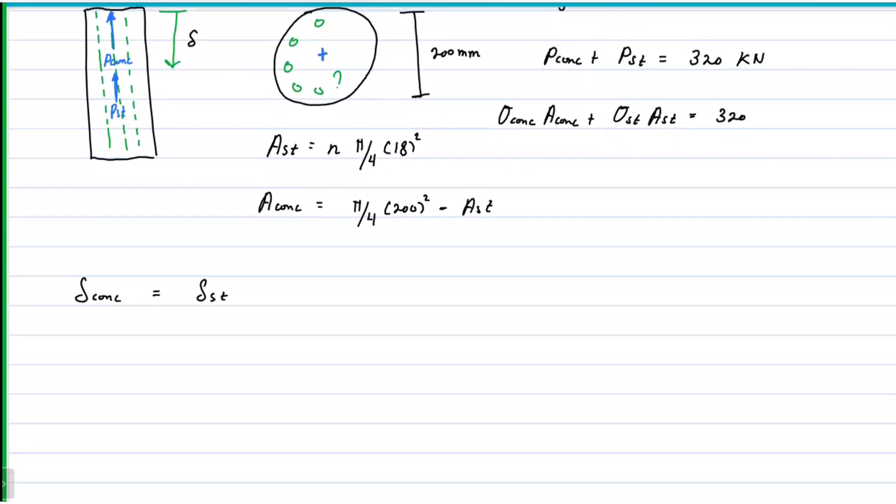Bago tayo mag-proceed doon, consider muna natin kung ano yung mga stresses na gagamitin natin, since hindi natin pwedeng i-maximize yung 6 megapascal for concrete and 120 megapascal for steel, kasi hindi naman sila sabay masisira. Based dito sa figure, we could say that the deformation of both materials would be the same. So the deformation of concrete is equal to the deformation of steel. Pwede natin i-set up yung equation in terms of stresses: stress ng concrete, length ng concrete over E ng concrete, is equal to stress ni steel, length ni steel over E ni steel.

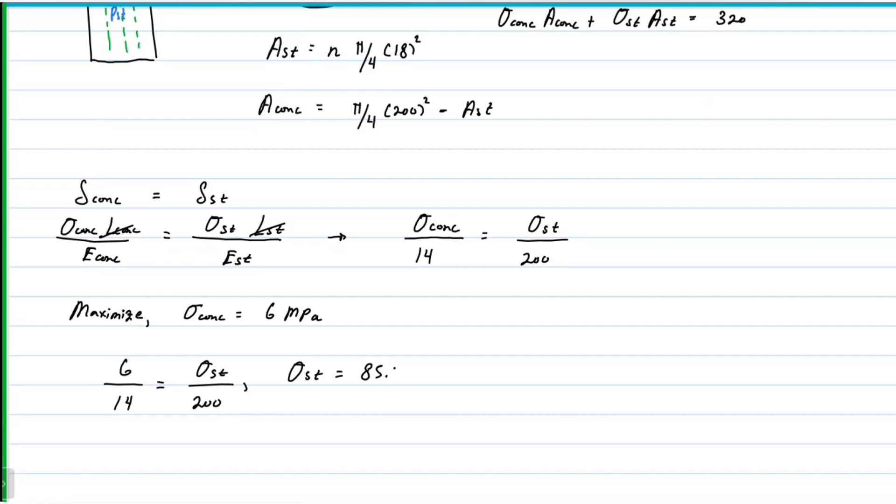Since they have both lengths, pwede natin siyang i-cancel out. Mabubuo natin yung equation: stress of concrete over modulus of elasticity ng concrete, given as 14 gigapascal, is equal to stress of steel over modulus of elasticity ng steel, 200 gigapascal. By familiarization, we could i-maximize na natin yung stress ng concrete. Equate na natin yung stress ng concrete equal to 6 megapascal. Pag ginawa natin yan, that will be 6 over 14 equals stress ni steel over 200, solving for the stress of the steel. Ang magiging stress niya sa steel is equal to 85.71 megapascal, which is less than doon sa allowable stress niya na 120 megapascal.

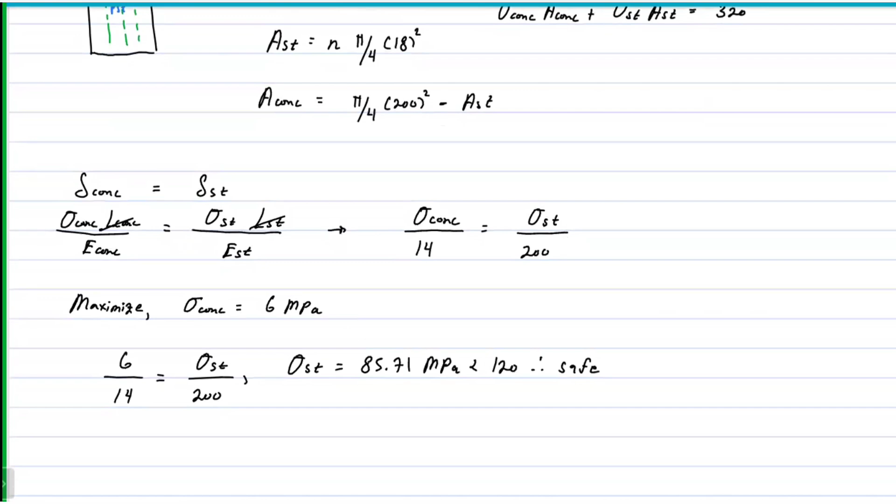Therefore, this is safe, and we will utilize the values of stresses: stress of concrete equal to 6 megapascal, and stress of steel equal to 85.71 megapascal. Ito yung gagamitin natin for our equation dito. Stress of concrete, that's 6 times area ng concrete, so that's pi over 4, 200 squared, minus area of the steel, plus the stress of steel, 85.71, times area of steel, equal to 320 kilonewtons.

From this equation, we could solve for the value of steel. Nakapag-produce ka ng one equation, one unknown. So solving for the values, input na lang natin sa calculator. Since gumamit nga pala tayo ng kilonewtons, multiply natin to ng 1,000.